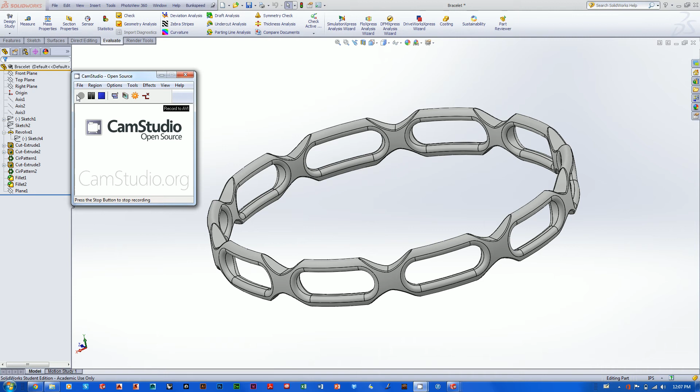If you remember from our class, this is the bracelet that I built in our class along with you, and I made the decision that I'm going to have this thing 3D printed. So I wanted to make a quick video to show you guys how to double check your parts and make sure that they are ready to go for the printer.

So anyway, here's our part, and you remember how we made it. The first thing I want to do is double check the size once and for all. I know it was built off of a revolve, and the sketch for that revolve is here. If I unfold that original revolve feature, I'll get the sketch, and I can go to edit sketch. I'll remember that I've got some dimensions on here, and right now my dimensions are in inches.

If at any point I want to check those in millimeters, I can go down here to the lower right hand corner of my screen and just change this to millimeters. You see it flips me back to the standard view, and I'll have to exit and enter that sketch again to see. Okay, so I've got 40 millimeters, and that's half of the diameter of my bracelet.

So I'm going to go here to my digital calipers. I'm going to switch the mode to millimeters and just pull it out 80 millimeters, and kind of wiggle that around my hand. I think it's going to be tight, but hopefully I'll be able to squeeze that puppy on there, and then once it's on my wrist I know it's going to be big, and like we said in class, it'll be flashy.

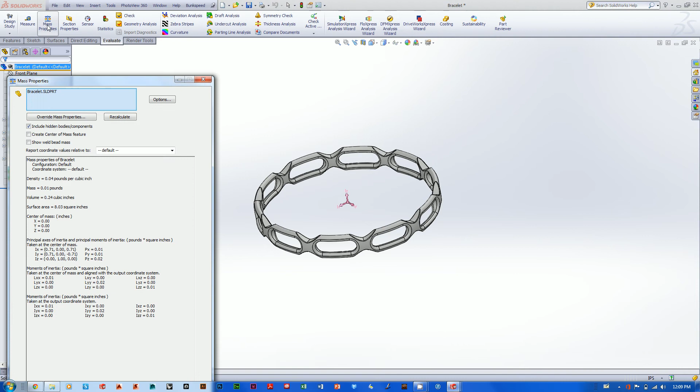So there's that. Okay, so then I'm going to go to mass properties, and I'll click on the part itself. There we go. I'll take a look here, and it says it's only 0.24 cubic inches. Volume is the thing I'm looking for right here, and so that is not even a single cubic inch, which is a little bit suspicious to me.

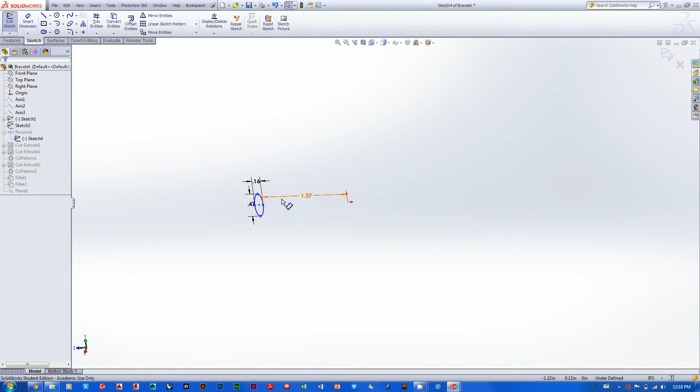But I'll go back in here and take a look at some of the other features. If I go back to that original sketch in the revolve and edit that, I realize the depth of this thing is 0.16 of an inch. Height is about half an inch. So I'll go back to my calipers here and check that out.

If I look at my caliper and open it up to, well, we'll say 0.47 of an inch, I realize that this bracelet is really small. It's a thin, super thin little band, 0.16 of an inch. I'm just adjusting my caliper now - it's very, very thin.

So that's fine with me, and I'm not opposed to that, considering the concept behind this bracelet was to eventually have this thing made out of a precious metal. I think the render we used in class was gold, and it would be cool to see this thing in platinum or something like that. So in that case, we don't want a very large body or volume. Also, I don't want to spend too much on this because this is my first round of what I hope will be a bracelet project that continues into several more iterations.

So this is just my first prototype. If it is too small, well, that's fine. If it turns out to be too brittle to be printed on the machine, well, then we'll print it out anyway, and we'll break it, and we'll figure out what we need to do next.

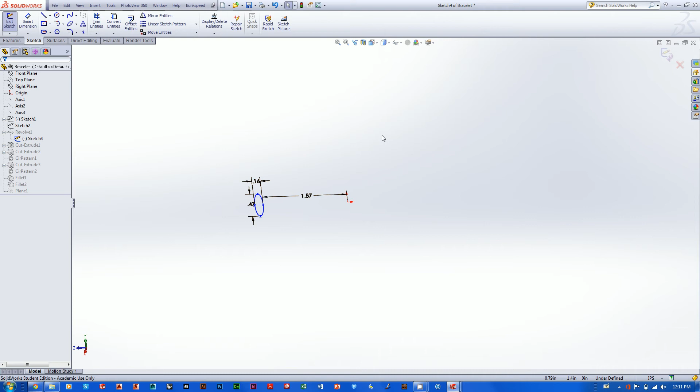So let's do that. I'm just going to exit out of this sketch and say, okay, I'm happy with this. The only thing you have to do to prepare your file and create that STL file is go up to File and Save As.

Let me just go here to my desktop, to Desktop Stuff. I have a file for our class right there. We'll go Solidworks, here's a file, STL. I'm just going to save this with the correct naming structure, which is going to be my name.

And I'm going to do an underscore, and I'll do another underscore. And I'm going to print this on the Z Corp, which, if you remember, is the powder printer. The reason I'm going to do that is because it's cheapest, and because I don't want to have to deal with breaking off my support material, since I know this thing is going to be very thin and small. I want to just be able to blast this with a little jet of air and have it clean from there on out.

So I'm going to add the date, which I have to check. What is the date today? It is 2/4, so we'll just enter that in numerically here, 2/4, and it is 2014. So that is good. I'm going to hit save.

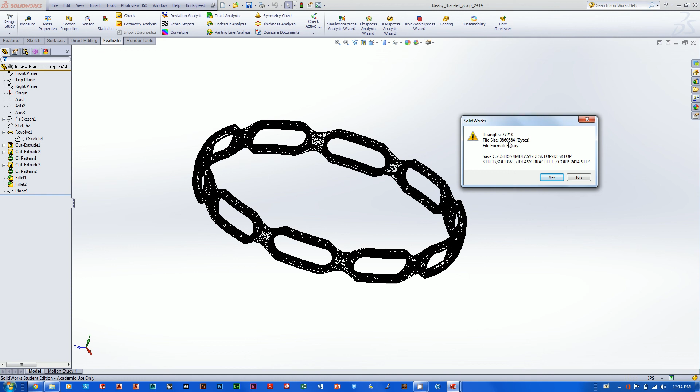So hit save, and this is what I was looking for originally. What you see is that SolidWorks transforms your solid model into a series of triangles and polygons, and that is a universally read file. That is your STL file, and it gives you some information about it here, and you just say yes, and you're good to go.

So that's a good real life scenario, right? We want to save the part file, of course, because if we do want to make any changes to this file later on, which we definitely will, we're going to need to have that part file saved along with the STL. The part file is the only one that can be adjusted.

Now, an STL file, that's sort of like flattening your Photoshop file or something like that. It's an uneditable file that can only be read by the 3D printer. You can't open an STL file, back it up again, edit it, and then resubmit it. You have to open up the part file and then save as an STL from there. So that's all good to know.

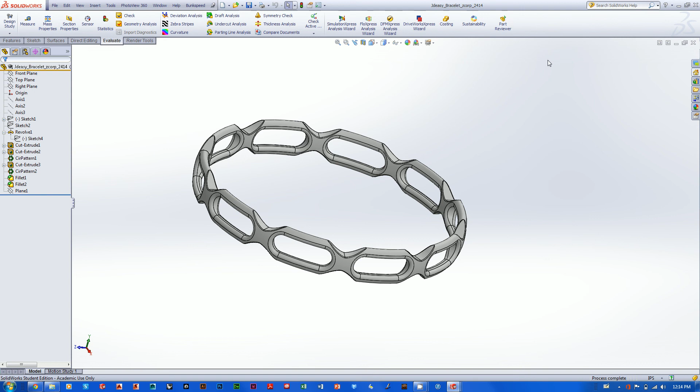So we're good. Go ahead and do that with whatever design it is that you finally decide on. I'm going to send this off to Chris in an email as an attachment, and I'll get myself a quote before I do it. Hopefully we can get this printed out pretty quick here, and we'll all get a chance to look at it before you know it.